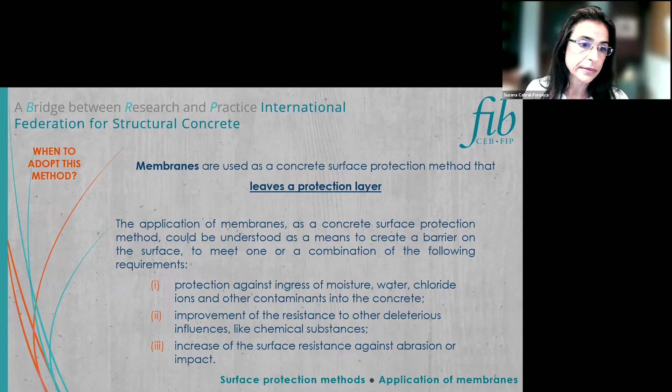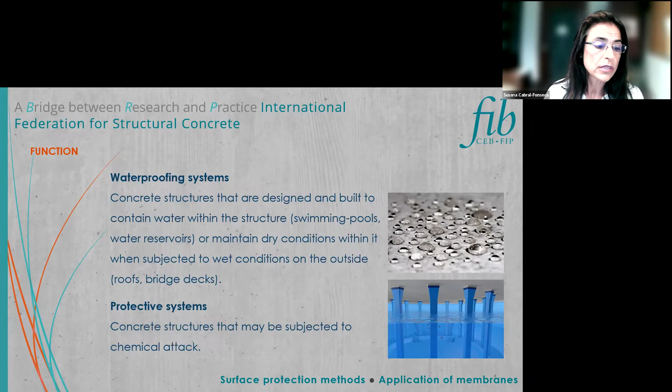We have essentially two types of systems, the waterproofing and the protective. The first is used where concrete structures are designed and built to contain water within the structure, such as swimming pools or water reservoirs, or to maintain dry conditions within it when subjected to wet conditions on the outside, as happens in roofs or bridge decks. The second type of system is the protective one, used in concrete structures that may be subject to chemical attack.

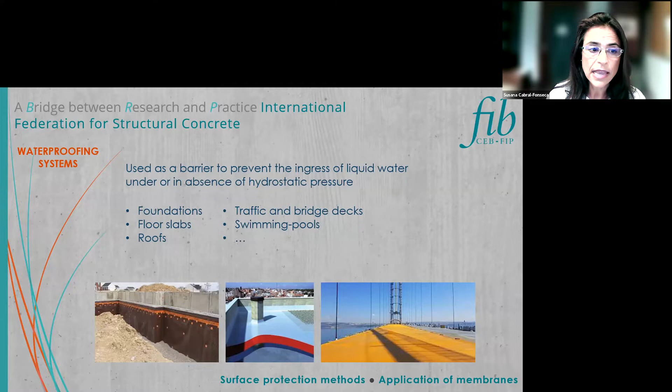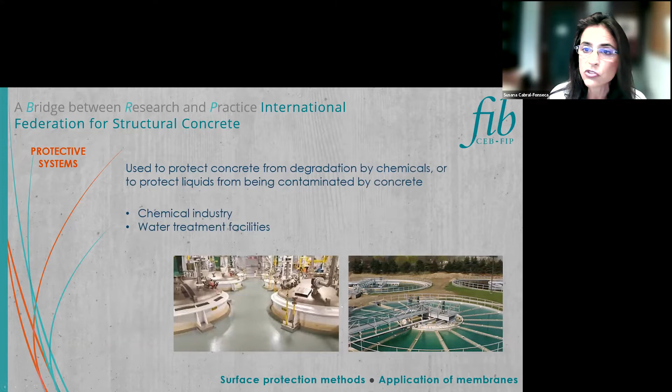Waterproofing systems are used as a barrier to prevent the ingress of liquid water under or in the absence of hydrostatic pressure. Examples of these applications are foundations, floor slabs, roofs, traffic and bridge decks, and swimming pools. The protective systems are used to protect concrete from degradation by chemicals, or to protect liquids from being contaminated by concrete, as in water treatment facilities or in the chemical industry.

We are talking in our presentation about the most important types of membranes: the liquid applied membranes that I am showing you, and the prefabricated membranes that my colleague Jorge Grandão Lopes will show you after me.

So let's move on to the liquid applied membranes. Liquid applied membranes are applied on site in a liquid form and can be water or solvent based. They can be applied in a single or two component system, the reactive systems, with or without heating. Sometimes, for special applications, it is necessary to build a multi-layer membrane with a sequence of different products.

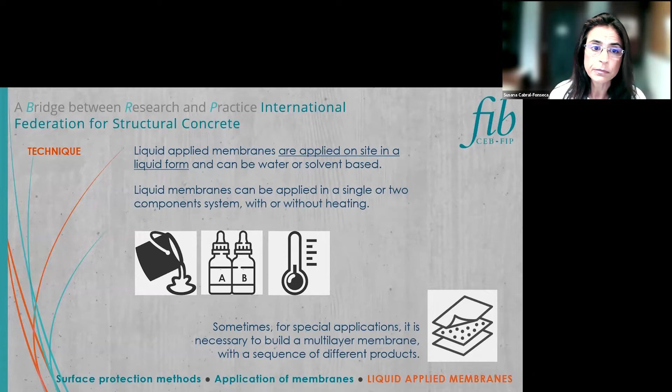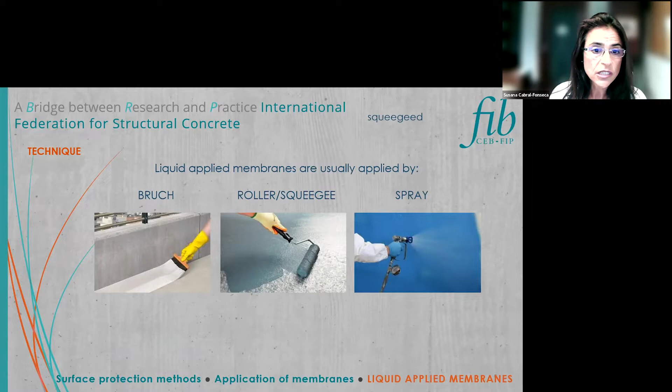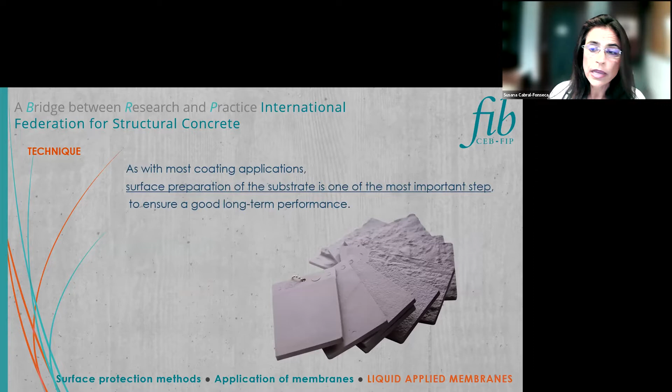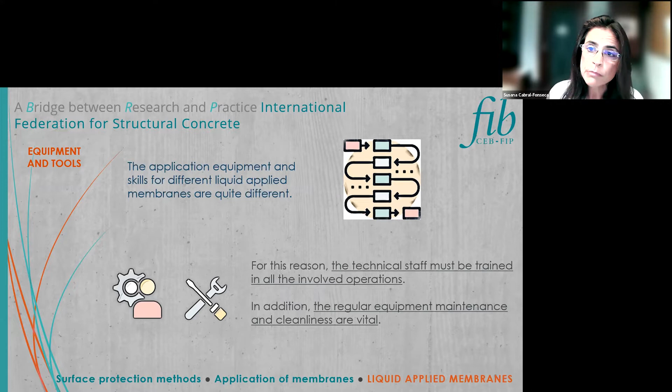The techniques used to apply liquid membranes are usually brush, roller, squeegee, and spray. As with most coating applications, surface preparation of the substrate is one of the most important steps to ensure good and long-term performance. The application equipment and the skills for different liquid applied membranes are quite different and sometimes complex, so the technical staff must be trained in all involved operations. In addition, regular equipment maintenance and cleanliness are vital.

Protection systems with membranes should be designed by a specialist, and this is very important because he needs to demonstrate that he has a suitable level of knowledge on the products, the systems, and on the selection of the particular solution for each case. Designers should always use normative references and existing codes of practice in their project specification.

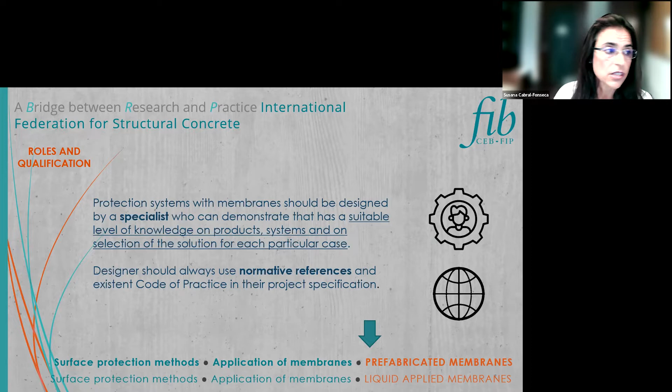This is also true for the prefabricated membranes. Have a specialist in the design and the specifications for the particular case.

The selection of the appropriate solution for a specific project involving liquid applied membrane should take into account three types of aspects. The first one is the installation requirements. It's important to have clean, dry, and sound concrete surfaces. We need to choose which type of technique: spray, brush, roll, or squeegee. Control the ambient conditions and have availability of skilled and experienced applicators.

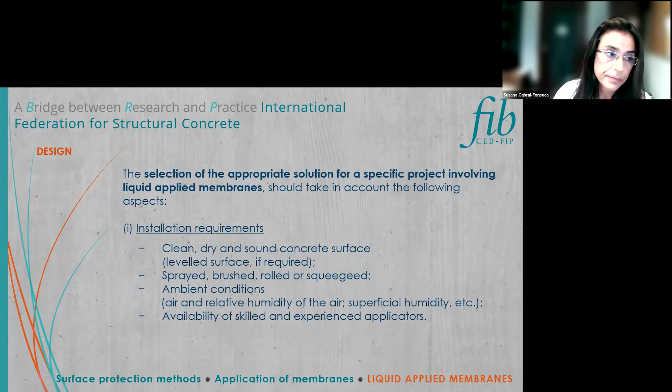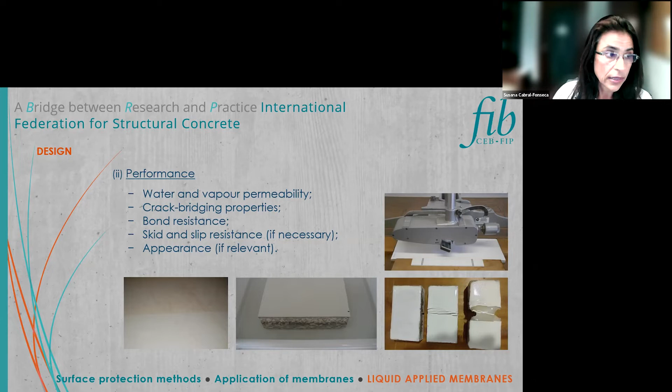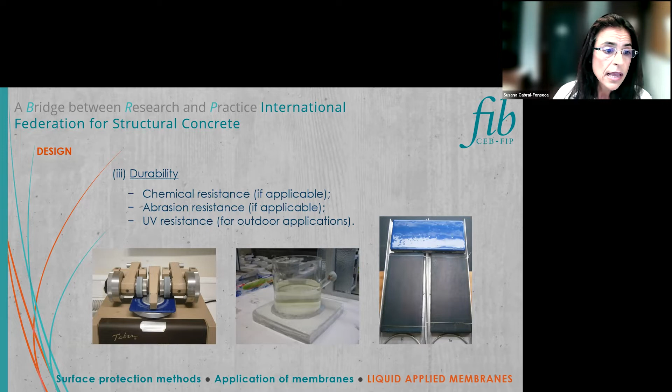In terms of the membranes itself, their performance in some very important properties needs to be taken into account. I will show you the importance of water and vapor permeability, in particular for waterproofing systems, but also the crack bridging properties, the bond resistance to the substrate, skid and slip resistance if necessary, and appearance if relevant. Durability is very important in some circumstances. Have knowledge about the chemical resistance or abrasion resistance, and for outdoor applications, the ultraviolet resistance.

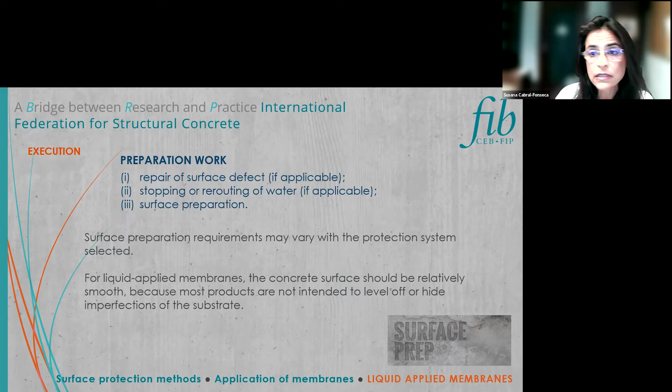The execution starts always with the preparation work. It's very important to have surface preparation, as I have already said, and this surface preparation must be done according to the protective system selected. For liquid applied membranes, the concrete surface should be relatively smooth because most products are not intended to level off or hide the imperfections of the substrate.

For many projects, it will be necessary to prove the membrane being applied in a site trial in order to certify its compliance to the specifications and to the requirements requested by the designer. This is particularly true where the performance of a new type of membrane or system must be proven.

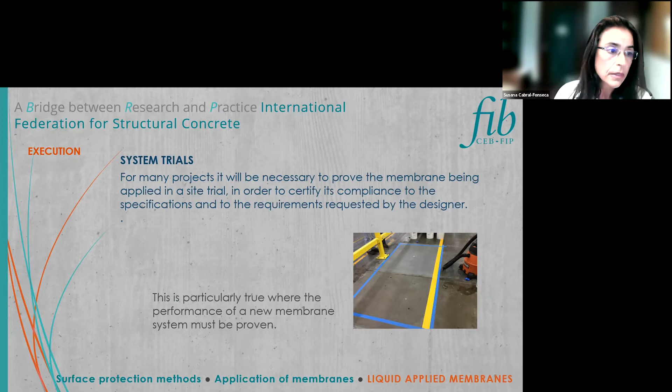In the execution procedure, there are three types of problems that can affect the performance of the membrane systems applied in liquid form. Application factors such as poor mixing of the components, mixing of components at inappropriate temperatures, incorrect proportioning of the components, or delay in application of the mixed components.

Another problem can arise from the substrate conditions - if there is moisture in the substrate and if there is poor or inadequate preparation of the surface. And the ambient weather conditions: particularly in outdoor application, the speed of the air, variation in air temperature, relative humidity, and the presence of rain could affect the performance of the membrane being applied in this liquid form.

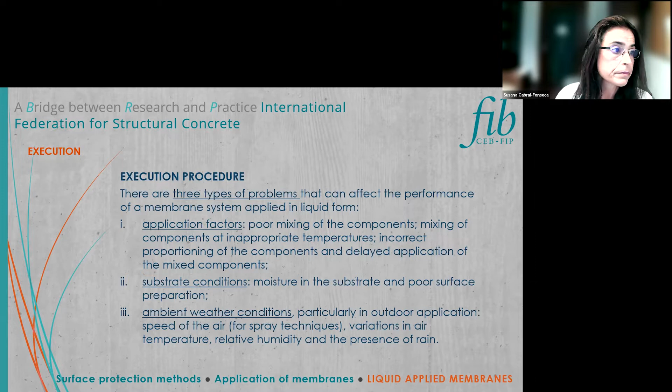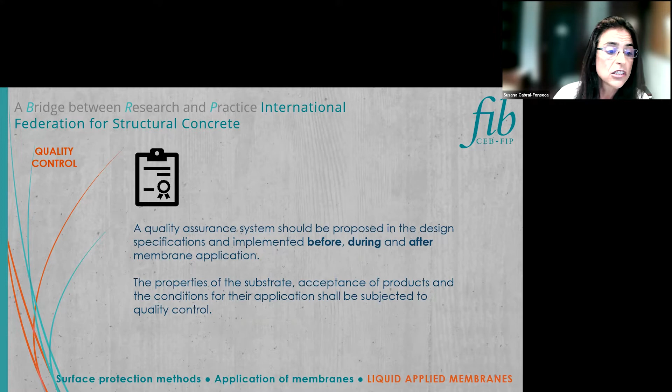A quality assurance system should be proposed in the design specification and must be implemented before, during, and after the membrane application. The properties of the substrate, the acceptance of the products, and the conditions for their application shall be subjected to quality control.

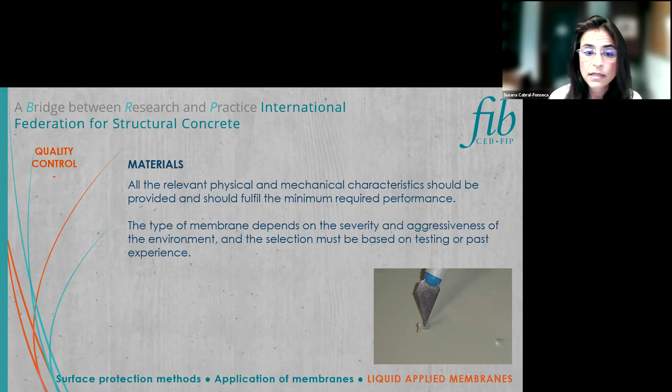In the case of the materials, all the relevant physical and mechanical characteristics should be provided and should fulfill the minimum required performance. The type of membranes depend on the severity and aggressiveness of the environment, and the selection must be based sometimes on testing or on past experience.

Before the intervention, a quality control for the preparatory work must be implemented, and the air temperature, humidity, and substrate temperature should be monitored before the membrane application.

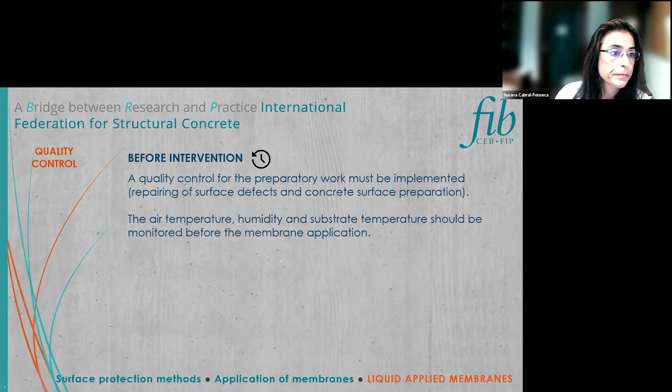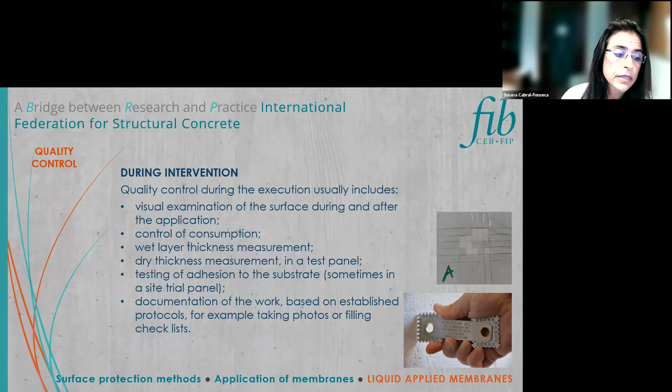During the intervention, the quality control usually includes visual examination of the surface during and after the application, control of consumption, wet layer thickness measurement, dry thickness measurement in a test panel usually, testing of adhesion to the substrate, sometimes in a site trial panel, and documentation of the work based on established protocols, for example taking photos or filling checklists.

After the intervention, an inspection and maintenance plan should be implemented, indicating the periodicity and type of actions to be performed. Periodical inspection should be reported and any eventual deterioration should be evaluated.

The concrete protection with membranes requires regular maintenance, and the type and frequency of maintenance required are directly related to the types of deterioration problems involved and depends on the system and conditions of use.

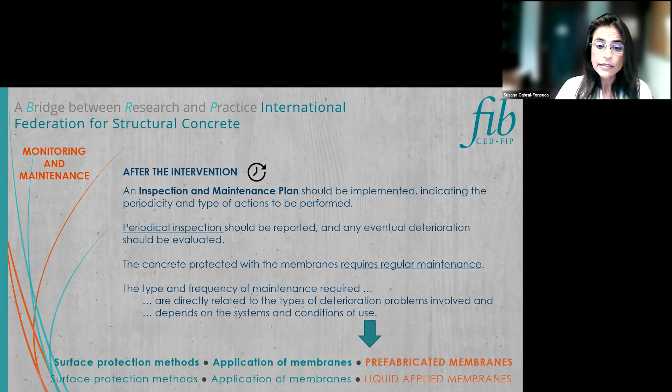And this is also true for the prefabricated membranes that we will present in the next part of this presentation, by Jorge Grandão Lopes. Thank you.

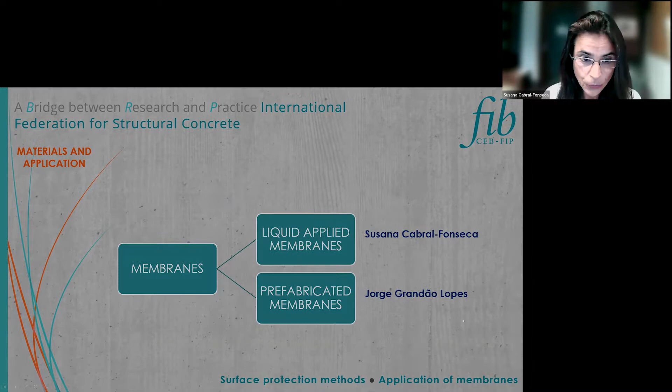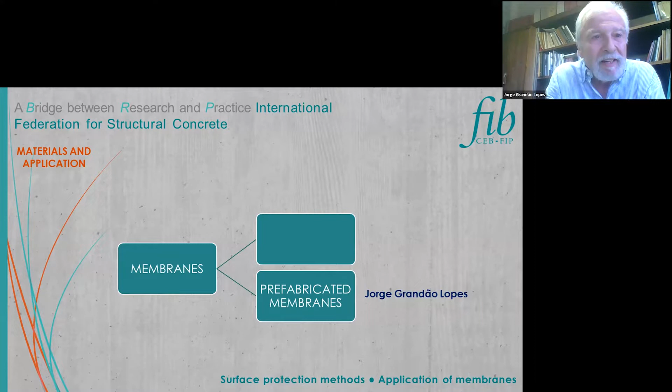As Susana said, my presentation will deal with the prefabricated membranes as waterproofing systems of several types of construction of concrete, such as building roofs, floors, and walls below ground structures, foundations, bridge deck, water reservoir, canals, and others. Prefabricated membranes are membranes applied as sheets or rolls.

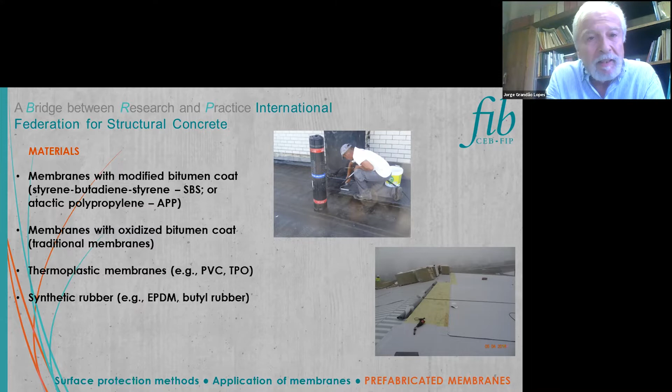The most common prefabricated membranes, at least in Portugal, and as I suppose in most European countries, are made of modified bitumen with styrene-butadiene-styrene, known as SBS, or atactic polypropylene, APP. Of course, there are still applications with traditional membranes using oxidized coats. The other types of prefabricated membranes are thermoplastics, such as polyvinyl chloride, PVC, and synthetic rubber, such as ethylene propylene diene monomer, EPDM, or butyl rubber.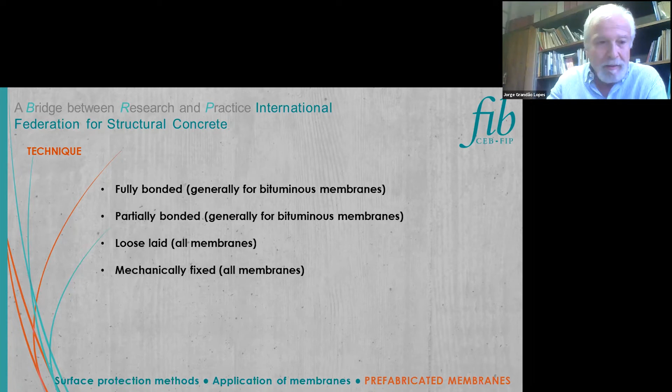The techniques of application of prefabricated membranes are the following: fully bonded, partially bonded, loose laid, or mechanically fixed. These membranes are generally put in place fully adhered or partially bonded to the concrete substrate, usually using a primer on concrete to improve adhesion. These membranes are bonded by heating using a hand or machine torch flame gun, as shown in the first photos.

Some prefabricated membranes include a self-adhesive backing on the sheet. These sheets are rolled into place and then bonded using a roller. The prefabricated membranes can also be applied with appropriate glue. In some countries, the use of a flame gun is forbidden for reasons of fire risk. All these techniques are also used to bond the lap joints of the membrane.

For thermoplastic membranes, the joint bonding techniques consist of using hot air guns or solvent-based glue. The loose laid technique consists simply of unrolling the membrane over the substrate. In this case, you need a heavy protection layer over the membrane to avoid its uplifting due to the action of the wind.

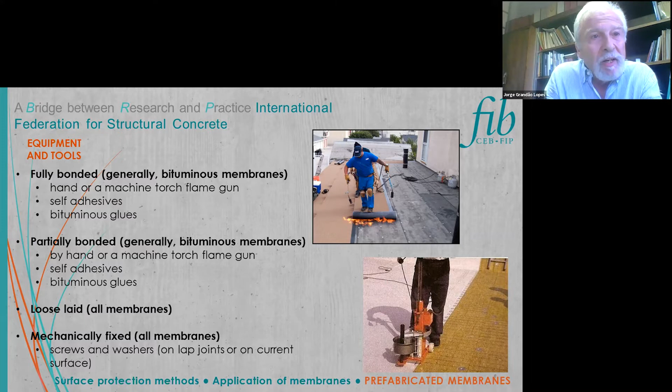Concerning the design, I will highlight some aspects for certain fields of application of the membranes. There are some considerations, made by Susana, applicable to prefabricated membranes, so I won't repeat those. For roofs, it's important to consider the accessibility of roofs - roofs used only for maintenance, roofs accessible to people or vehicles, or roof gardens. This affects the design of the layers of the roof, and also the type and position of thermal insulation.

On roofs, you have a warm roof or an inverted roof. The waterproofing in the inverted roof is below the thermal insulation. And of course, you have to take into account the ease of maintenance in the design.

For bridge decks or other trafficable areas, it's important to mention the mechanical resistance of the system, namely against braking effects, and the compatibility with the asphalt layer generally used on road bridges.

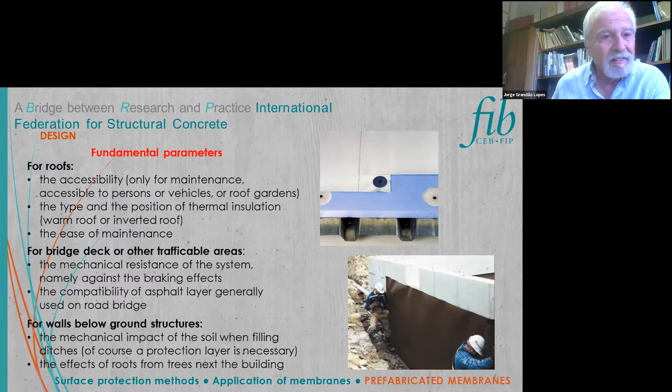Related to execution, I will highlight some aspects concerning the execution of prefabricated membranes. Ensuring the width of the membrane overlap joints across the entire surface of the concrete elements is an important aspect in the execution of the waterproofing system and its performance during the lifetime.

For adhered or fully bonded waterproofing systems, the cleaning and the level of humidity of the substrate are other important parameters to be taken into account.

Using a torch flame gun to melt the bitumen of the membrane to the support, the temperature of the flame, the distance from the gun to the membrane, and the speed of the gun are the three most important aspects to consider. Constancy of these parameters across the entire surface of the building element must be ensured, so workmanship is an important issue.

A very important aspect to consider is the quality of the execution of details. These singular points are generally the origin of leakage due to lack of design or difficulty in execution.

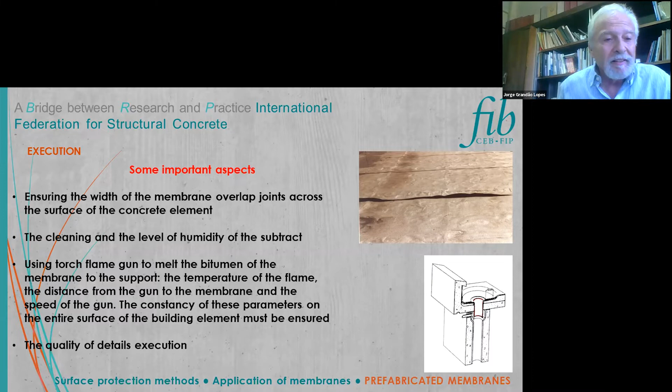Concerning quality control, let me give you an idea about some characteristics of prefabricated membranes for the field of application referred. These characteristics may have implications for the occurrence of anomalies that compromise the water tightness or the water vapor permeability of the membranes.

These common characteristics are well known: thickness, mass per unit area, tensile strength and elongation, tear strength, which is an important characteristic for the application, static loading and dynamic impact, and dimensional stability. There are also other specific characteristics applicable only to one type of membrane, such as the flow of the bitumen coat at elevated temperature for bitumen membranes, or the plasticizer content for PVC membranes.

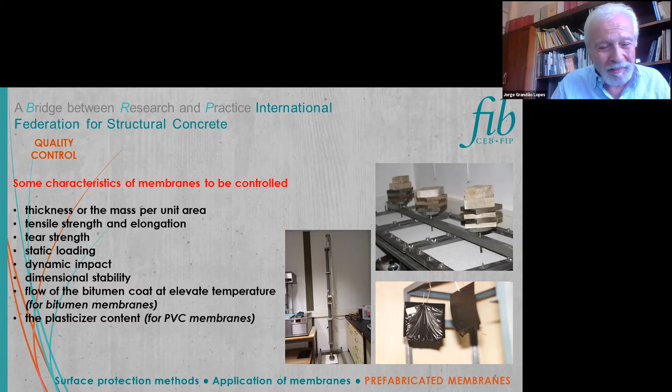So that is what I have to say about this matter in the time I have available, and I'm available, of course, for the questions you may have. Thank you very much for your attention.